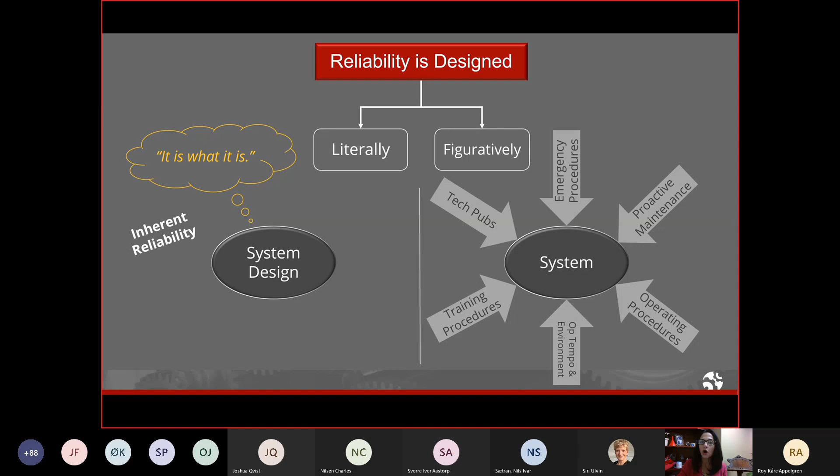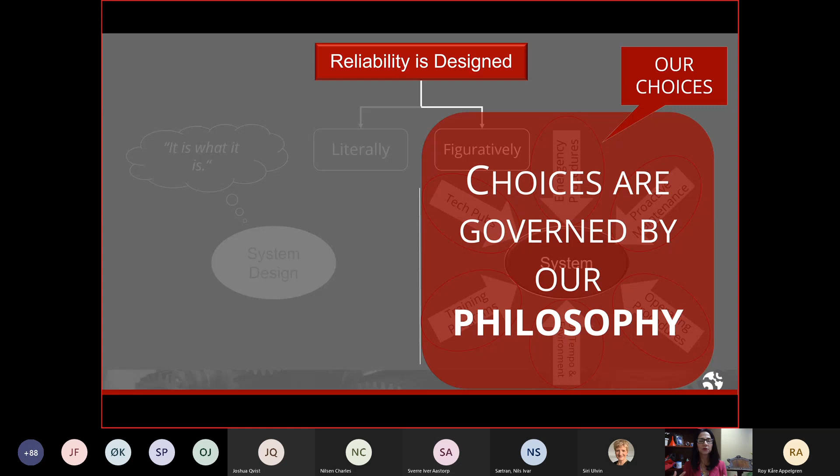See, inherent reliability doesn't mean how long something will last without failing. Inherent reliability means how long something will last when it's protected by the right proactive maintenance, but also some other actions that we take. Now, the quality of these actions are determined by our choices, and our choices are governed by our philosophy. And that is the easiest way to explain what reliability-centered maintenance is. Reliability-centered maintenance is a philosophy. RCM principles were first created out of a real sense of need, because RCM principles first started in the commercial airline industry. Now, at the time, they were having some issues, and that's what gave rise to reliability-centered maintenance.

So I would like to share that story with you.

Now, the story takes us back to the mid-1950s in the commercial airline industry, where at the time, this is the way that they believed equipment failure behaved.

So you see here we have the x-axis, which is age, and that can be considered in any number of units. It could be operating hours, calendar time, miles, takeoffs and landings, any number of units. And then you see the y-axis, which is the conditional probability of failure.

So essentially, the difference between conditional probability of failure and probability of failure is this: on the condition that an item makes it to this area, let's say 1,000 operating hours, on the condition that it survives to that age, now the probability of failure starts to drastically increase.

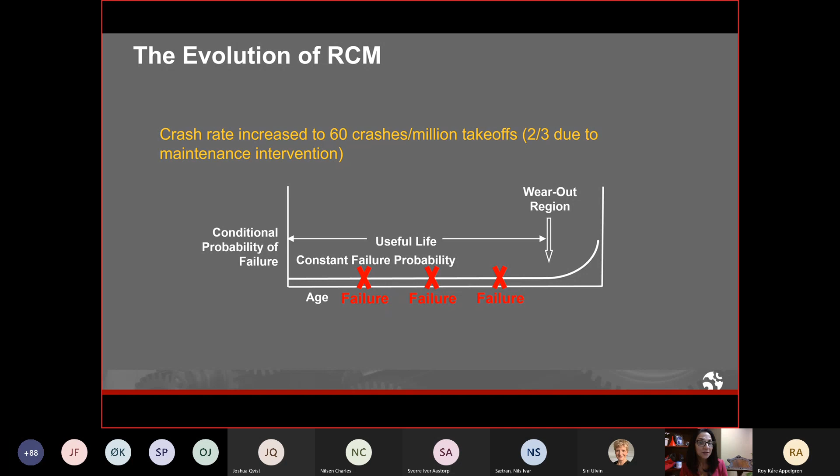So they needed to do something about this, obviously. Based upon their philosophy at the time, what they did is they moved their overhaul and replacement tasks to happen more often. They shortened the intervals. But what happened is the crash rate started to increase even more.

Now imagine if you are in charge of this at that time. It was a really alarming situation. So at United Airlines, there were a group of engineers who got together and they said, okay, here's what happened. We shortened the intervals and three things happened.

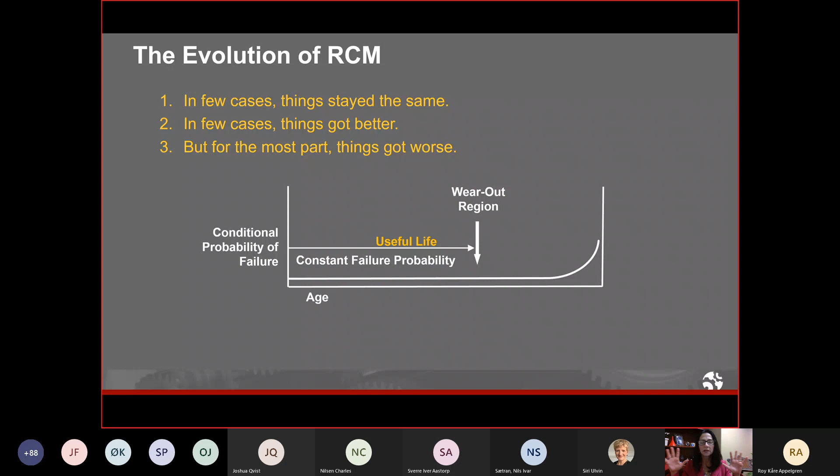In few cases, things stayed the same. In few cases, things got better. But for the most part, things got worse. And so that's what caused them to step back and say, we need a new way of doing business.

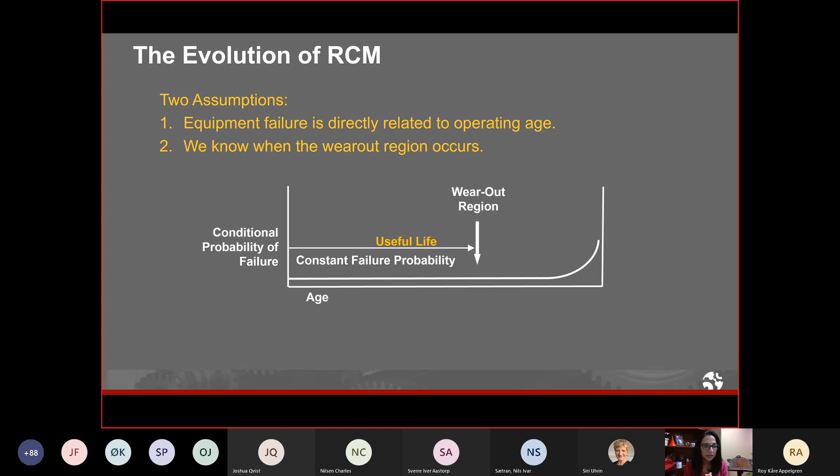And at that time, the engineers there at United Airlines, they got together and they said, okay, we have assumed that equipment failure behaves according to failure pattern B.

And they said, okay, we've already challenged that. We've moved the overhaul and replacement intervals back and things got worse. So they said, let's now challenge the idea that this is the way that equipment failure behaves. So they embarked on an enormous amount of research, and what they found literally rocked the world of maintenance at the time, because what they found is that equipment failure behaves according to 6 failure patterns that you see here.

Now, what was most interesting is this: the first 3 failure patterns have this age-related phenomena associated with them. But the other 3 failure patterns have this sense of randomness. So you can see here in failure pattern E, which is random failure, there's absolutely no relationship between how old something is and how likely it is to fail.

But what was most shocking to them is that when they did their research, and they researched electronics, hydraulics, pneumatics, turboprop engines, and analyzed structures, what they found is that only 11% of failure modes were subject to this age-related phenomenon. And what they found is that it was associated with simple items like tires and brake pads, compressor blades, and aircraft structure. And they proved that actually most failure modes were occurring randomly.

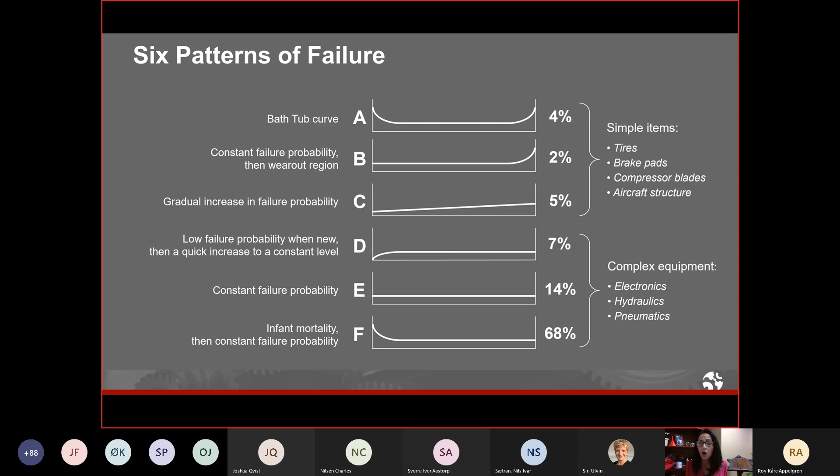And the randomness was associated with complex equipment like electronics, hydraulics, and pneumatics.

So they showed that, in essence, 89% of failure modes were failing randomly. So they needed a new way of doing business, and that's what gave rise to reliability-centered maintenance. If we take a step back, their entire maintenance philosophy was based upon failure pattern B, but only 2% of the failure modes were behaving that way. So that's one of the reasons why the crash rate was increasing.

The other thing you can see here is that 68% of the failure modes behaved according to failure pattern F, where we have this infant mortality, and then it settles down to a low level of random failure. So, infant mortality happens when things are new and we're working out the bugs, or maybe failure is induced because of maintenance or something done wrong.

So when they were taking care of their equipment, believing it behaved according to failure pattern B, not only were they wasting time—because if most things fail randomly, doing scheduled replacements or scheduled overhauls doesn't make any sense, since random means it has the same chance of failing today as it does tomorrow, as it does next week—but they were making things worse because they were reintroducing this infant mortality.

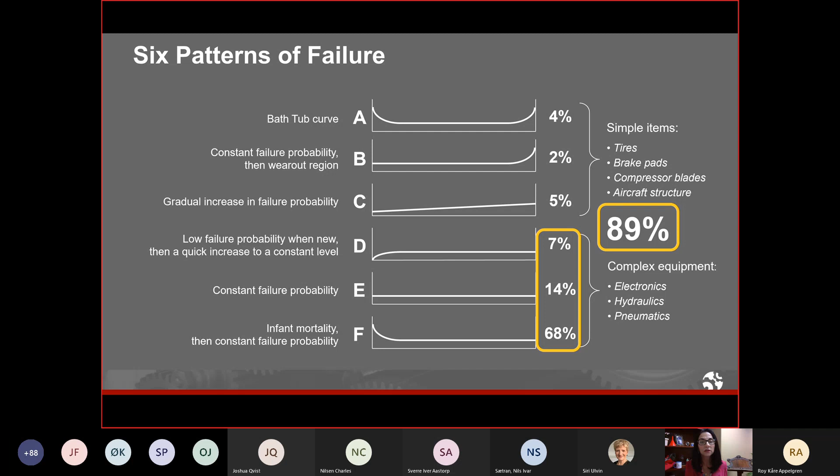So that is how reliability-centered maintenance was born. It was in the late 70s that the United States Department of Defense commissioned United Airlines, most notably two engineers, Stanley Nowlan and Howard Heap, to write a report on how they were coming up with their maintenance plans. They published the book in 1978, and they called it reliability-centered maintenance.

So this is the process now. The definition that I like to use for reliability-centered maintenance is this: it's a zero-based process used to identify the failure management strategies that are required to ensure an asset meets its mission requirements in its operational environment, in the most safe and cost-effective manner.

Now, one thing to note here is that the definition doesn't say it's a process used to make a maintenance plan, because it does that. But when reliability-centered maintenance is applied correctly with the right people, it can give us so much more. And I will give you some examples as we move on.

So the process consists of 7 steps, or answering 7 questions. And the first step is functions. Now, here's what's really unique about functions. My mentor, John Moubray, used to say that reliability isn't a thing on its own, but rather reliability is sprinkled amongst all of the functions of a piece of equipment.

So when we identify functions, we're actually defining the kind of reliability that we need from our equipment. Now, too often in our industry, functions are written as a matter of routine—you know, to provide compressed air. Well, that's a very general function, say, for example, for a compressor.

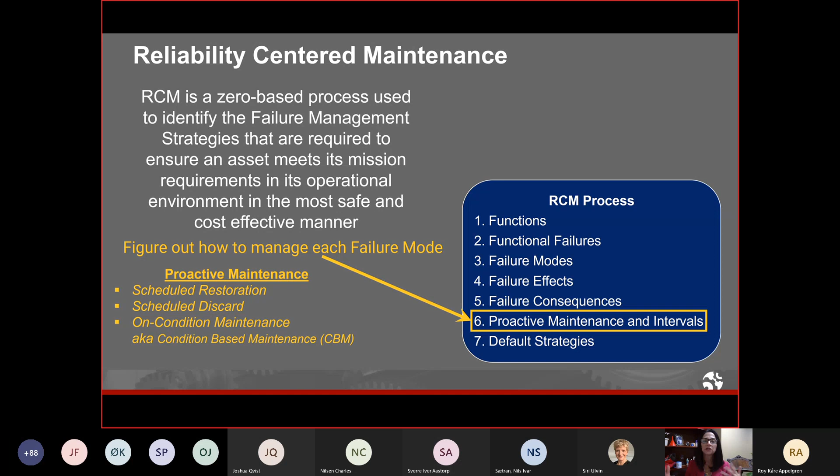Then we get to step 6, and this is when we consider if there's any kind of proactive maintenance we should be doing - a scheduled restoration, a scheduled discard, or a scheduled replacement task - and if there's any kind of on-condition maintenance that could be done. A synonym for on-condition maintenance is condition-based maintenance. I think in our industry, the term condition-based maintenance is more widely used, but they mean the same thing.

Now here is where philosophy is really, really important, and it's important for two reasons: because our reliability philosophy has to be rooted in the reality of failure. Back in the early days of the commercial airline industry, when they had complex equipment and were maintaining it under the assumption that pretty much all failure modes occurred because things got old, that's when they got into trouble and the crash rate increased. It's because their philosophy was inconsistent with reality.

And still today in our world, some organizations need to take a look at their philosophy. Most of the basics of maintenance and reliability are embodied in the RCM process. I want to go over just two parts of the philosophy to give you an example of what I mean when I say RCM is a philosophy.

So the first thing I want to share and talk about is preventive maintenance - we'll talk about scheduled restorations and scheduled replacements. Now, with what I'm about to share, I suspect there are many of you already aware of it. If that's the case, I'd like you to think about who in your organization should know about it, but maybe doesn't.

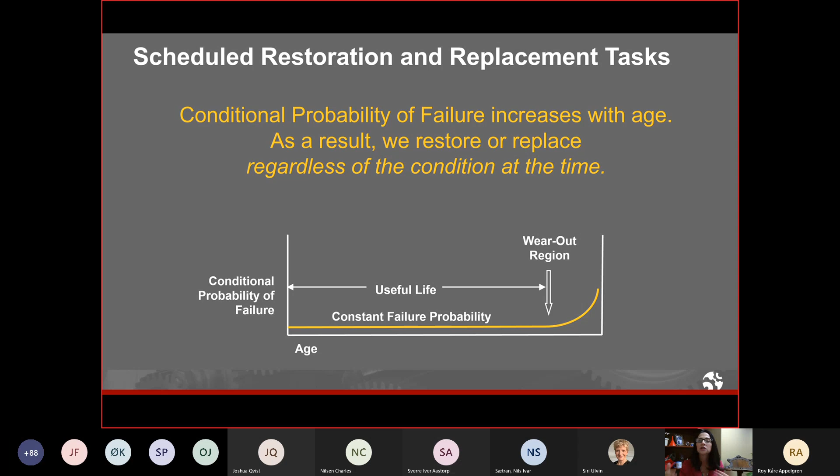When it comes to a scheduled restoration - another word for that is an overhaul - or a scheduled replacement task, we know, and we opened the presentation with this, it's failure pattern B, where the conditional probability of failure increases with age. As a result, we restore or replace regardless of the condition at the time. We're not going to go and inspect and only do something if it needs it - we're just going to schedule it and do it.

So the thing about scheduled restoration and replacement tasks is that their intervals are based on the useful life. For example, my 2014 Subaru Forester - the useful life of its engine oil is 7,500 miles. I have it replaced every 7,500 miles.

I don't bring it in and ask them to test the oil for me. I bring it in and they change it for me at 7,500 miles because I know if I drive much further, additives will be depleted. Water may start to intrude. I'm not going to be able to lubricate my internal engine components properly, and that's just going to cause failure down the line. So it's based on the useful life, not an MTBF, not a mean time between failure, not an average. It's based on a useful life.

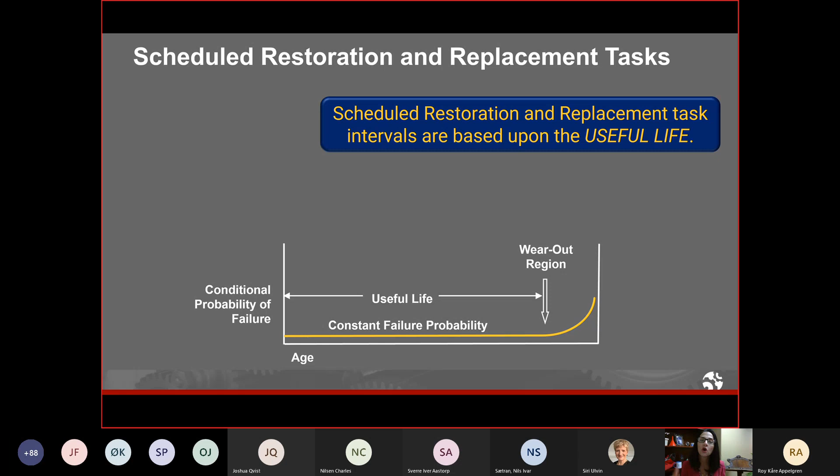Now, the next thing I want to talk about is condition-based maintenance. Embodied in condition-based maintenance is more of that reliability language. And again, if you know about this, think about who on your team maybe doesn't, but should.

Now, we talked about in the beginning when we talked about the failure patterns that roughly 89% of failure modes in complex equipment fail randomly. But we don't have to be afraid of that. One could sit back and say, well, what do we do? If it fails randomly, then how can I manage it?

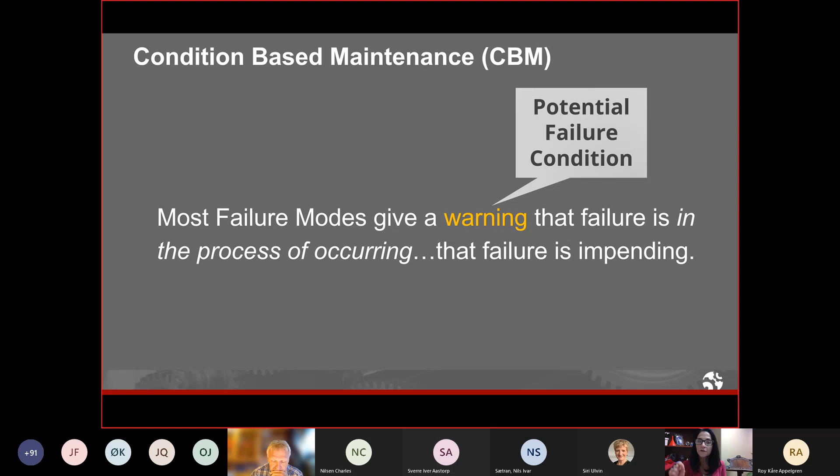Well, the thing is that most failure modes give us a warning that failure is in the process of occurring. In other words, that failure is impending. Now, in the context of reliability-centered maintenance, that warning is called a potential failure condition. Now let's take a look at the P-F curve.

Now on this curve, this x-axis is time or age, and again, it can be considered in any number of units: calendar time, operating hours, miles, hours flown, etc. But the y-axis is the resistance to failure. So you see here, for example, let's just take a new component, the resistance to failure is at its highest. But as time goes by, most failure modes will start to give us a potential failure condition, give us a warning that failure is impending if we don't intervene. And if we don't, then failure occurs. Well, in the context of reliability-centered maintenance, from the time that a potential failure condition is detectable to the point that failure occurs, this is called the P-F interval.

Nancy, do you have time for a question? Yes, yes, certainly.

Paul Larry, I'm working for Repsol Oil Company. You said that preventive maintenance only were scheduled restoration and scheduled replacement. As I know the PMs now, they are very often scheduled spot checking without doing anything else. And if I may say, if it's correct, it's a kind of manual CBM.

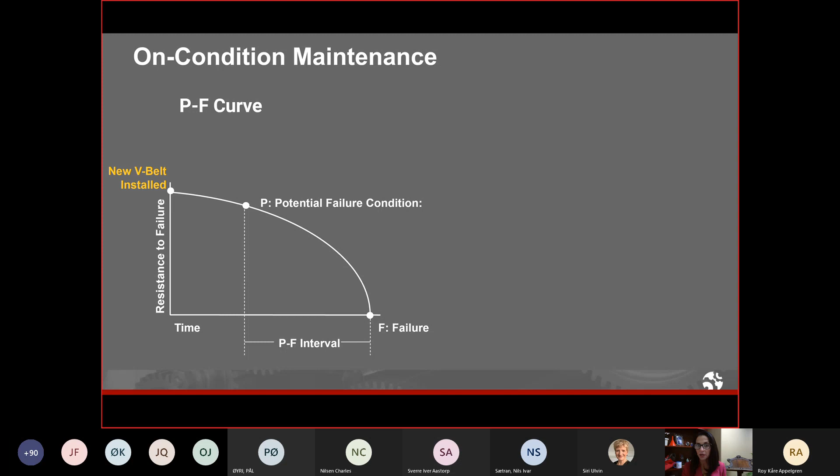So let's take a very simple example to illustrate the P-F curve. Let's say we install a new V-belt. Well, we know that after a certain amount of time, how much, for purposes of this example, we don't care about this time frame. But once we get to this point where this belt is in the process of failing, it's going to give us some warning signs, visual evidence of cuts or cracks or frays. And if we ignore it, if we don't inspect it, well, eventually the belt is going to break. So from the time that visual evidence of cuts and frays are detectable to the point that the belt breaks, let's just say for example purposes that is 6 months.

So that's called the P-F interval. Let's say Johnny goes out today to inspect the belt, and he doesn't know where he is on this curve. Let's say Johnny's right here, but he doesn't know it. He goes out and inspects the belt, but he does not see any evidence. So now Johnny goes back, and let's say he comes back 3 months later.

The general rule of thumb with the P2F interval is that you half the P2F interval. So you do inspections at half of what the P2F interval is. But as long as it's less than the P2F interval and you have enough time to act, that's okay. So let's just say, for example purposes, Johnny's doing this every 3 months.

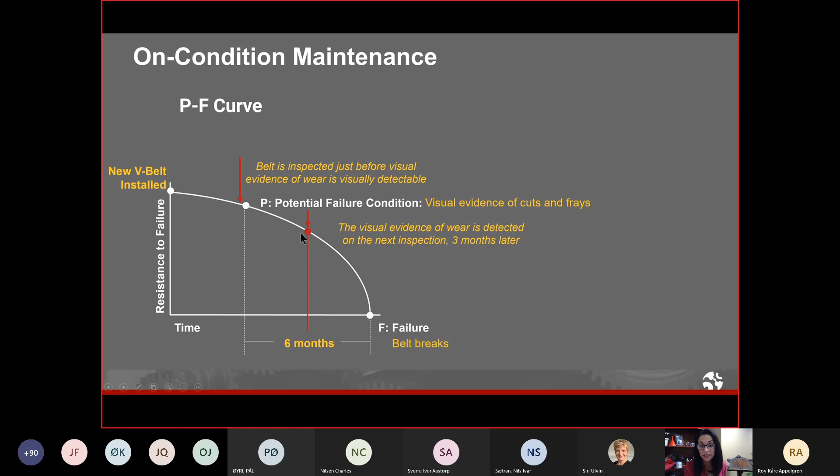So now Johnny comes back 3 months later. He doesn't know where he is on this curve, but he's here. So 3 months later, he detects the visual evidence. Well, now we know we have a minimum of 3 months remaining. This is called the net P-F interval, but essentially all you need to know is: what's the minimum amount of time I have remaining to take action to manage the consequences of failure? Well, in this case, I have 3 months to do something about it.

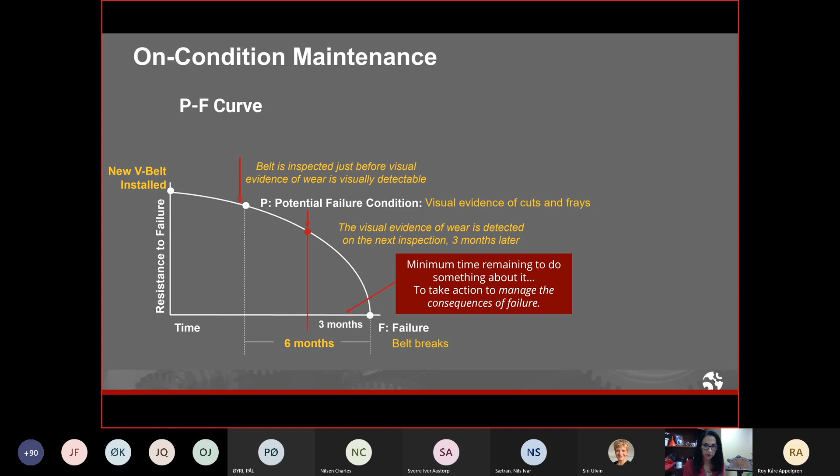So let's look at two different scenarios. Scenario one: let's say in my operating context I'm going to have to take this machine offline to inspect the belt, and let's say I take it offline every 6 months. Can this V-belt successfully be monitored at intervals less than the P2F interval? The answer is no, because I stand the chance of missing the failure, since my P2F interval is only 6 months. But let's look at scenario two, where my asset is taken offline every month.

Can that be monitored at intervals less than the P2F interval? It absolutely can. So when we do condition-based maintenance, we have to make sure that minimum amount of time we have remaining is enough time to take action to manage the consequences of failure.

Now that might be okay. If I find this warning, I have to replace a part. Now, what if it takes me 6 months to get a part? Well, if my P2F interval is 6 months, that's not going to work. But if I have one waiting on the shelf, then it would work. So you see how having this information available to us puts us in a very strong position to make decisions.

Now, we talked about philosophy and we talked about the language of reliability. Still today, I talk with people often who, when I share the P-F curve, it's new to a lot of people. It needs to be this terminology, this language of reliability, needs to be spread to everyone who's responsible for reliability in an organization.

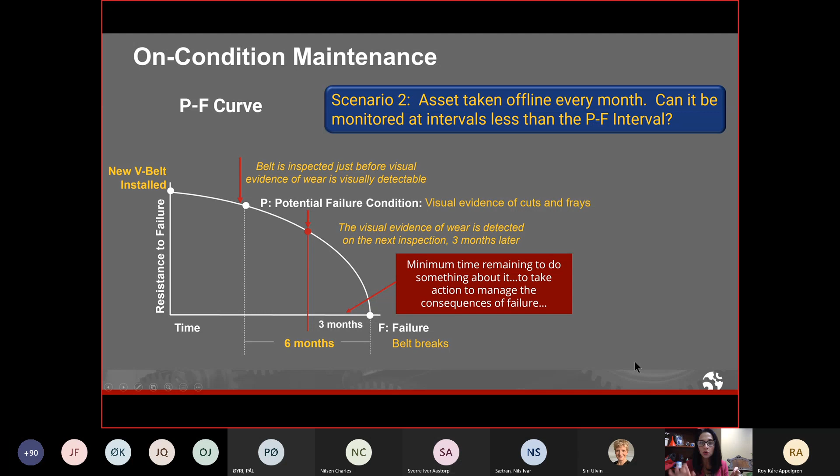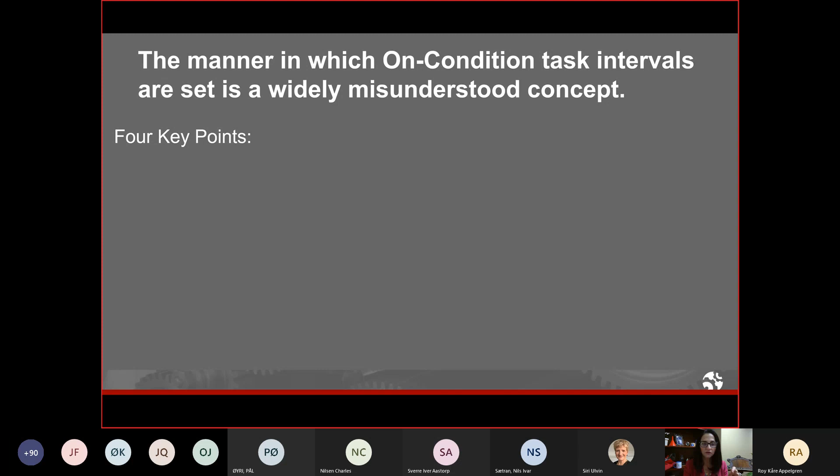Now, let's talk about a few key points about on-condition task intervals, or condition-based maintenance task intervals. Those two terms are synonymous, CBM tasks. I want to talk about 4 key points, three on this slide. Number one, on-condition maintenance task intervals are not based upon MTBF, or mean time between failure. MTBF is an average that shows about how often something will fail. That's not what we're looking at when we're doing condition-based maintenance.

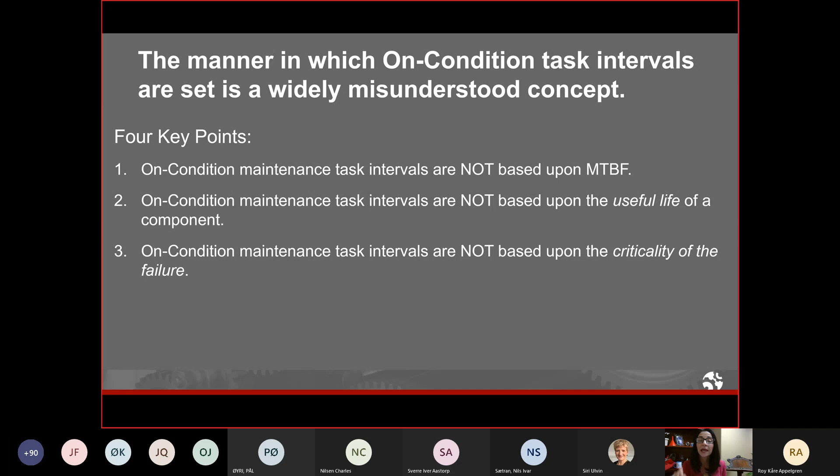Another thing is that on-condition maintenance intervals are not based on the useful life of a component, and they're not based upon the criticality of the failure. On-condition maintenance task intervals are based upon how quickly failure occurs once the potential failure condition is detectable. And that's the key to condition-based maintenance. The key to successful CBM is identifying what the potential failure condition is, defining what failure means to the organization for that particular failure mode, and then defining that P-F interval.

Now, that is often not an easy task. And I'm going to share a really good way on how to get those intervals in just a moment.

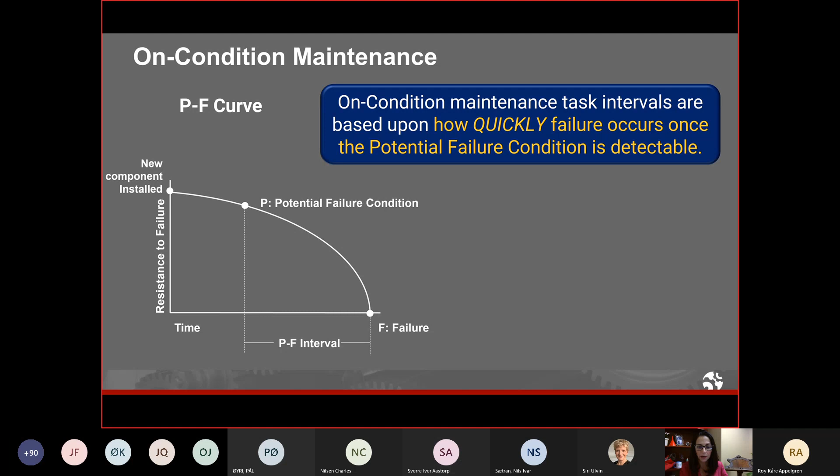But before I do, I want to talk about shiny object syndrome. I don't know if it's a term here in the United States. I don't know if you use that term in Norway, shiny object syndrome. But this can be a very big issue when it comes to condition-based maintenance. And I talk to a lot of people within organizations where they fall into this trap, meaning organizations often consider advanced monitoring equipment as a solution to reliability problems.

Vibration analysis, thermography, sophisticated equipment, continuous monitoring equipment installed directly on equipment - this can be a very expensive trap to fall into if buying and installing the equipment, either installing it directly on the equipment or just buying the advanced monitoring equipment as a first step.

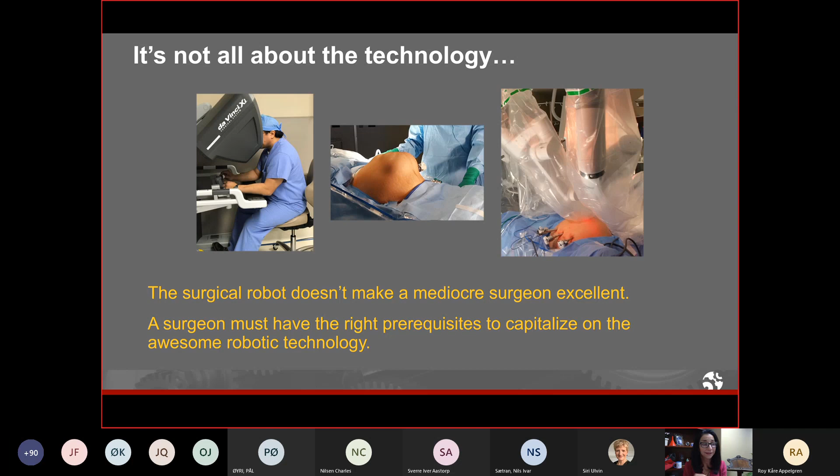One thing my husband noted is that the robot doesn't make a mediocre surgeon excellent. The technology is not what makes an excellent operation. A surgeon has to have the right prerequisites, the right experience, to be able to capitalize on this awesome robotic technology. A surgeon needs to know how to do this operation open - before the robotic or laparoscopic approach, a surgery like this would have like a 6 to 8 inch incision. So the point is, if you've got a not-so-good surgeon, the robot is not going to make him really great. In some cases it could make things worse because now he's got the anatomy to deal with as well as figuring out the technology of the robot.

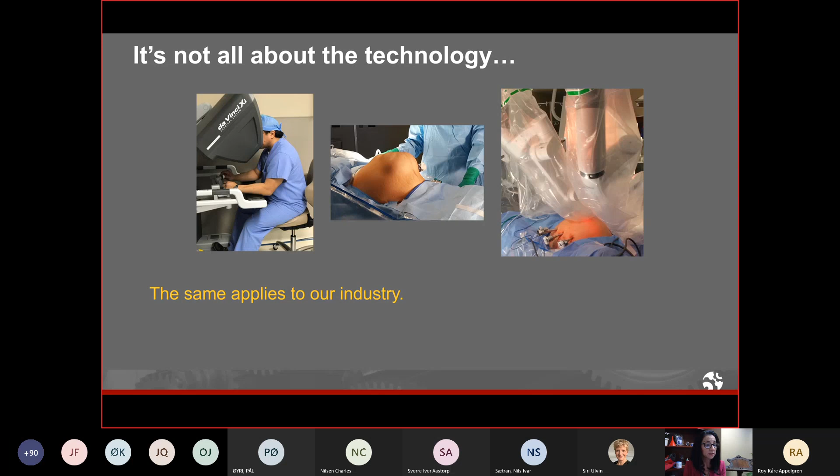The same thing applies to our industry. Just like a surgeon has to understand the anatomy and be able to do the operation in an open fashion before they move to the robot, when it comes to condition-based maintenance we have to make sure we go about it correctly. There are two scenarios: one where we fall into that expensive trap of buying and installing the monitoring equipment first - but that can be very expensive.

The correct way to go about it is, number one, let's define what we even need to achieve with our equipment - that's going back to writing functions. It's no coincidence that's the first step in the RCM process. Secondly, we identify the failure modes we intend to manage, because we manage physical assets at the failure mode level. Then we write our failure effects, assess the consequences, and then we can figure out what potential failure condition we even intend to monitor, and identify the P-F interval, making sure it's long enough to manage the consequences of failure.

Once we do that, we can determine if it's cost effective for us to make that investment in the sophisticated equipment, because quantifying potential failure conditions and P2F intervals, in some cases, can take time and resources. So we have to sort all that out ahead of time and only implement the technology if it makes sense.

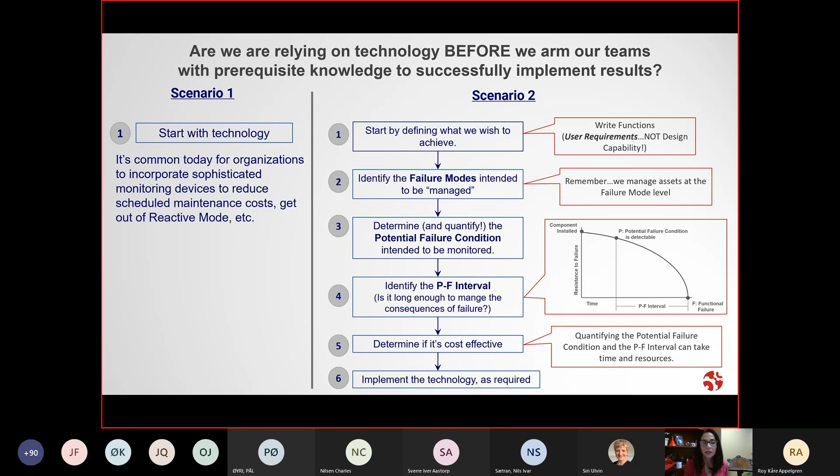The problem with scenario one, starting with that technology, is not only that it can be a very expensive trap for an organization, but we risk overlooking the human element. As technology increases and becomes more sophisticated in our world, in my opinion and in what I have seen, the human element becomes even more important, and the language of reliability becomes even more important.

It's very important to make sure the people responsible for our equipment understand why change is taking place. Because if you just install a sophisticated monitoring device and tell Johnny, 'you don't have to do that 6-month task anymore, we've got this monitoring device,' it can leave people feeling confused. It can leave people feeling left out, maybe even angry is too strong a word, but that really contributes to the decline in reliability culture.

We can have the best devices and the best systems in place, but if our reliability culture, if our people are not acting as a cohesive team, that in itself can be a cause of chronic failure.

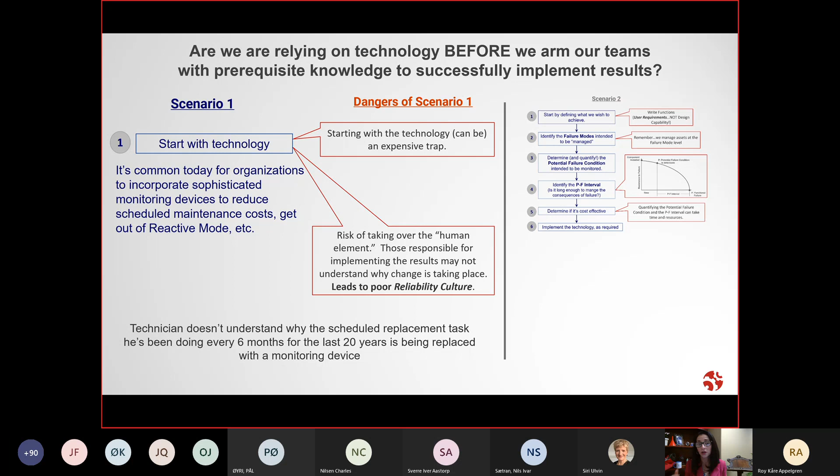When it comes to condition-based maintenance, not just CBM, today what's on the scene is the Industrial Internet of Things, artificial intelligence. We now hear about the digital twin. So really, any improvement process needs to start with the fundamentals and not leave anyone out. That's one way RCM can serve your organization, aside from all the excellent failure management strategies we derive from the process. It can also serve to share the fundamentals with your reliability team so we start to build that culture and cohesive team.

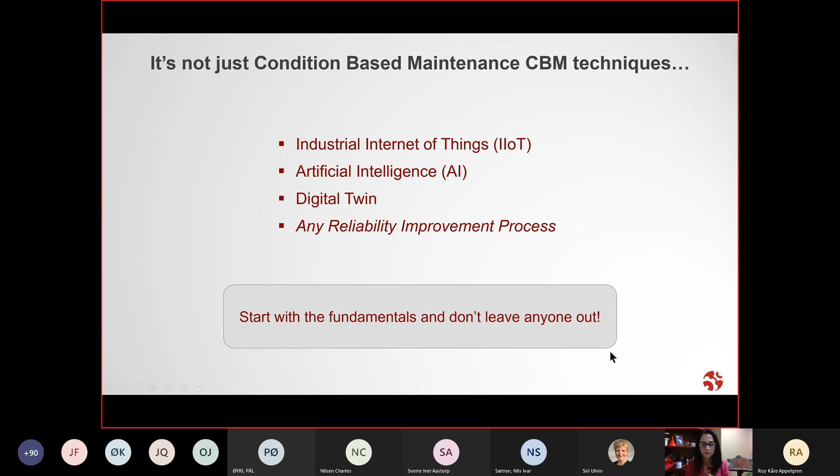I'll pause here in case there are any questions. Okay, we'll move on, but just make sure you can still hear me. We can hear you. Okay, perfect.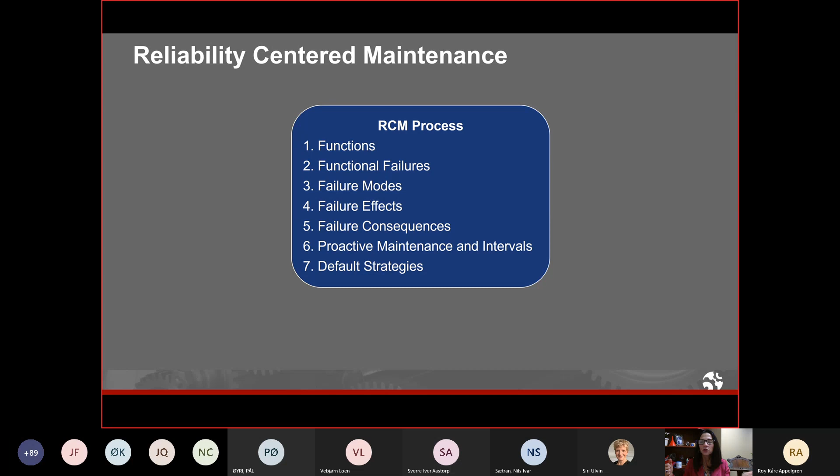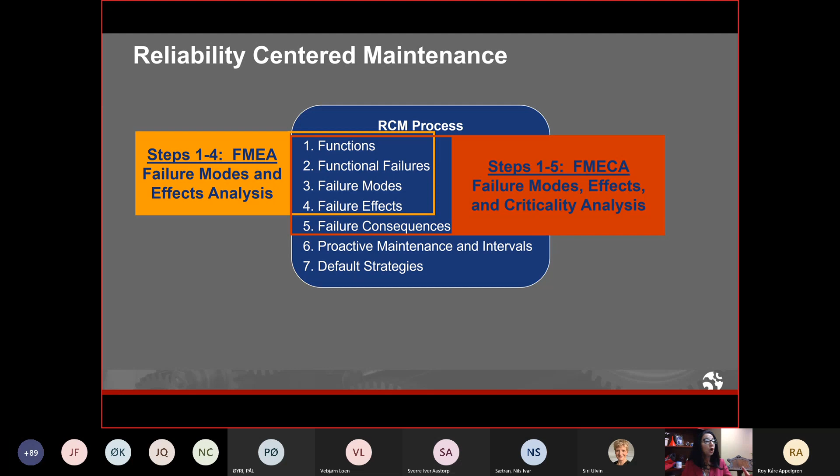I want to debunk a couple of myths because I often get asked: should we do RCM, should we do CBM, or should we do FMEA, failure modes and effects analysis? Here's the thing - when you do RCM correctly, the first 4 steps make up the FMEA. When we add step 5, consequences, that adds criticality. So steps 1 through 5 create the FMECA, the failure modes, effects and criticality analysis. If you're doing RCM properly, you're largely satisfying the requirement for an FMEA or FMECA.

And as we just went through, embodied in step 6 is the consideration of condition-based maintenance. So when you do RCM, you're doing FMEA, you're doing FMECA, and you're also considering condition-based maintenance.

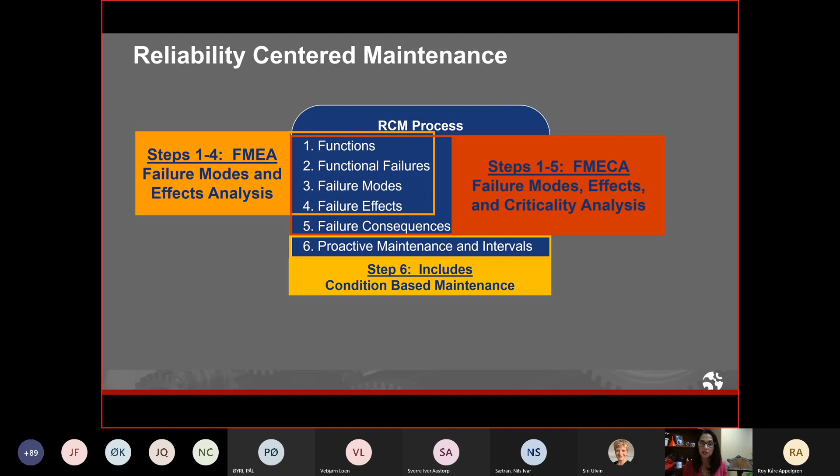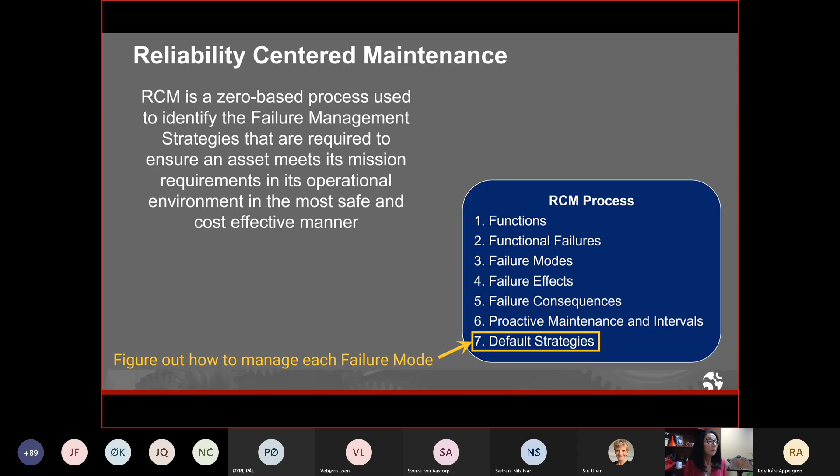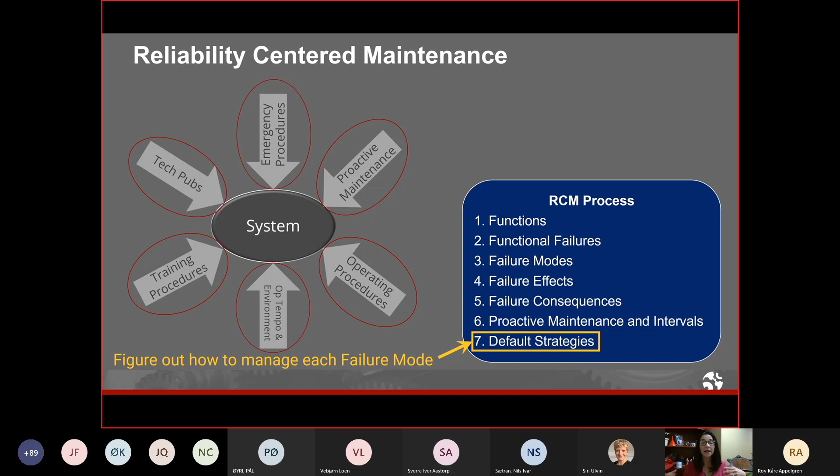After step 6, the last step is step 7, default strategies. Embodied in default strategies is figuring out how we could possibly manage each failure mode, because it may not be about maintenance. When we first opened with the presentation, we talked about how there are other elements that affect the system, like the quality of our emergency procedures, how comprehensive our training procedures are, operational tempo and environment - where we're operating our equipment and how often we are operating it.

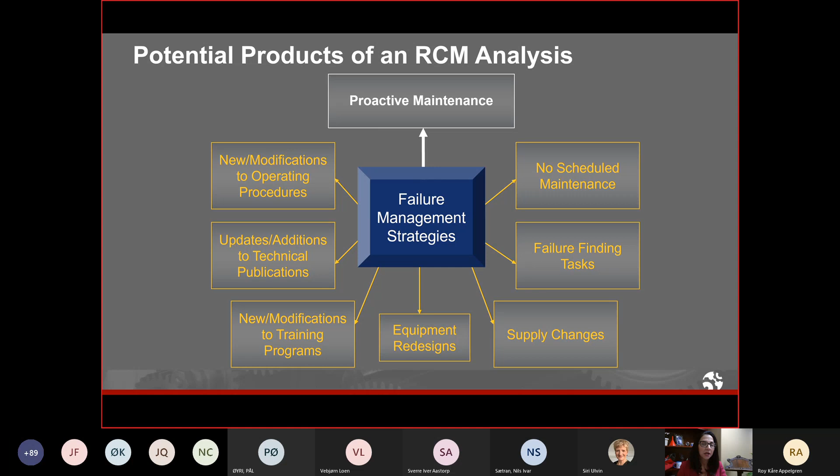So it stands to reason there are other things we may have to do to take care of our equipment other than maintenance, like update a tech pub, or redesign something on our equipment. Maybe we need to do a failure finding task, taking care of our safety systems and protective devices - those intended to keep us safe if something else goes wrong, like fire alarms and pressure safety valves. But for a lot of failure modes in complex equipment, we may consciously decide to do no scheduled maintenance and run to failure. So there are other products from an RCM analysis other than just maintenance.

I want to talk about data for a moment because it brings us to a very important facet of how RCM is applied. I want to talk about historical data and the RCM process. Now, I know baseball is an American thing. When I grew up as a little girl, baseball was very big in my house. I grew up in Boston with the Boston Red Sox. So I want to look at some batting data.

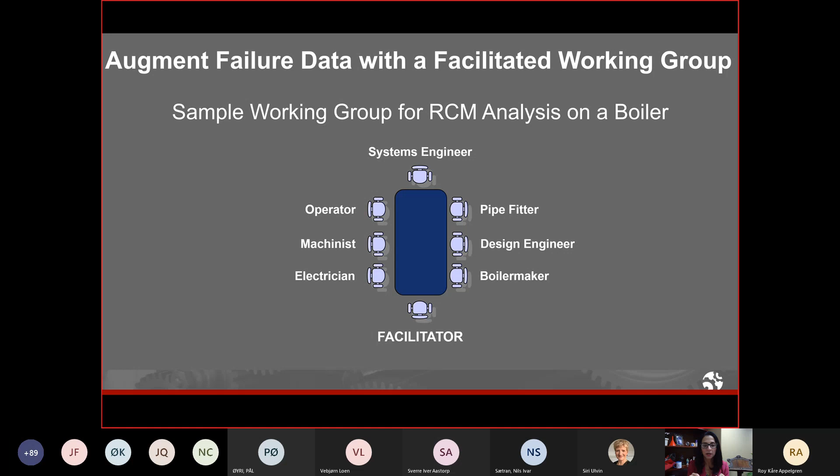Okay, the last things I want to talk about have to do with RCM implementation. Here is another area where organizations can sometimes make missteps when doing reliability-centered maintenance, and then RCM gets a bad rap. People will say, well, we didn't get what we needed from RCM, it took too long, it was too complex. If that happens, it's usually because the process wasn't applied properly and all the right people weren't involved. But here are some key points about implementation.

If you're thinking about implementing RCM, I would definitely say start small. Do one or two or three pilot projects so you can see for yourself what RCM can do, and then implement RCM more broadly. It's not like you have to decide today whether we're going to do RCM or not. Really, it's like anything - experiment with it in the beginning to see what you can get from it and if it meets your needs.

The other thing is that for pilot projects, it's important to choose equipment that's causing the most pain. Whether it's chronic failure or increased costs, whatever that pain point is, start with the equipment that's giving you the most trouble.